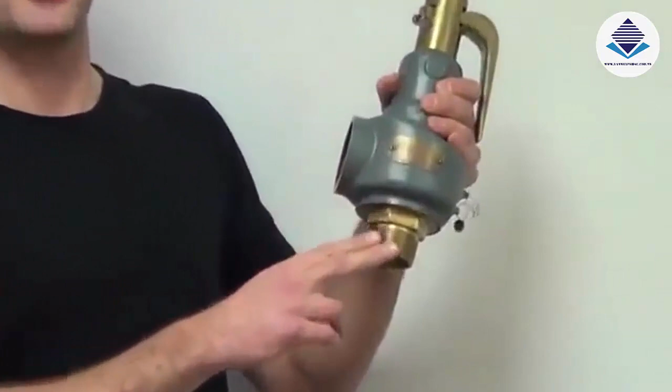The inlet and outlet may be threaded, it may be flanged, clamped, or even butt welded. Above the inlet is the body and the bonnet. On this valve, the body and the bonnet are one-piece construction. Typically on larger valves, the bonnet will be bolted to the body for ease of maintenance. The bonnet may be open or closed. If it's open, the spring will be exposed to the ambient conditions.

Above the bonnet is the cap. Again, the cap may be open or closed. If the cap is open, you'll be able to see the alignment rod, the compression screw, and the compression nut. On the back of the valve, you'll see the lift lever. Not all PSVs have this lift lever, but if they do, they serve two purposes.

One, if the valve is seeping a little bit, you can lift the lever and try to reseat the inner disc. Hopefully that will prevent the seepage. Two, you can test the functionality of the valve. By pulling on the lever, the internal spring will compress and the valve will pop, and you'll know that it's working. This gives no indication of set pressure though, it's only functionality. On the front of the valve, you'll see a nameplate. This essentially shows who made this valve and some important information on the characteristics of the valve.

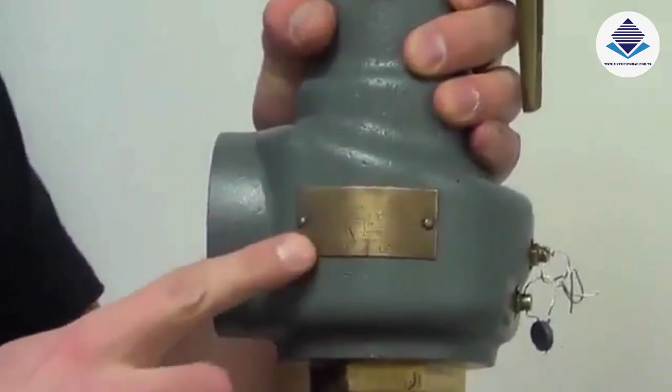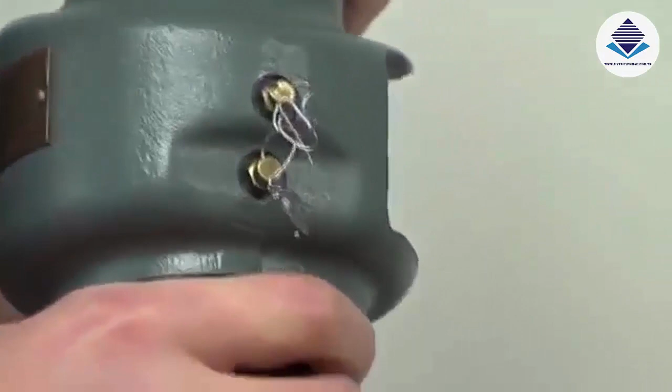On the back of the valve, you'll see some screws. Not all valves have these screws. Some valves only have one. The important thing to realize is all the screws are wired shut and they have a clamp on them. This prevents tampering, and also the clamp indicates which valve shop worked on this valve. And if this wire is missing, the valve must be taken out of service and it must be maintained before it's put back into use.

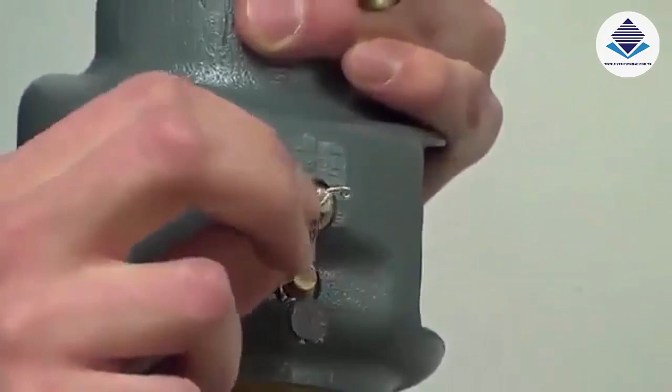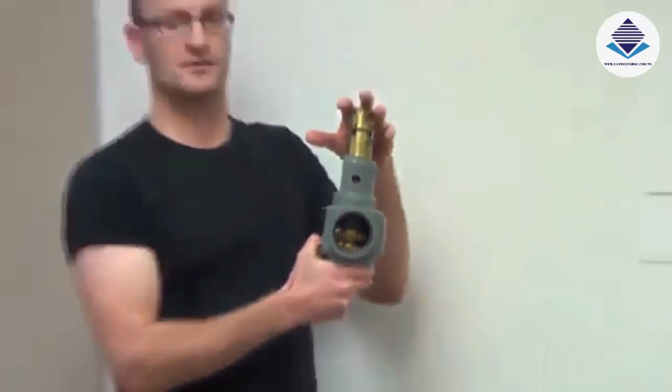On the front of the valve, you may see a vent hole. It's important to realize on a traditional PSV, this vent hole must be sealed when it is in service. That's incredibly important. Again, on a traditional PSV, the vent hole must be plugged when the valve is in service. Now that I've explained to you the outside of the valve, I'll try to explain to you the inside of the valve and the inner mechanisms.

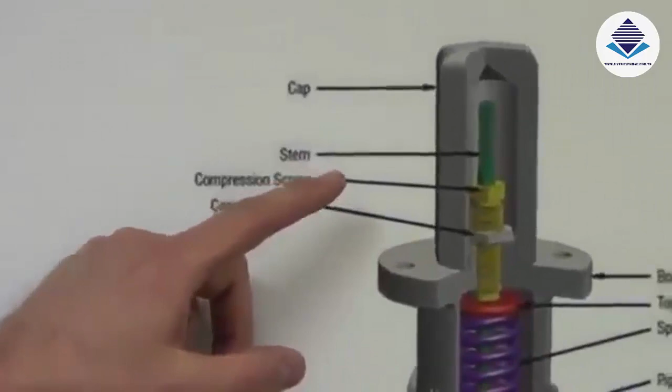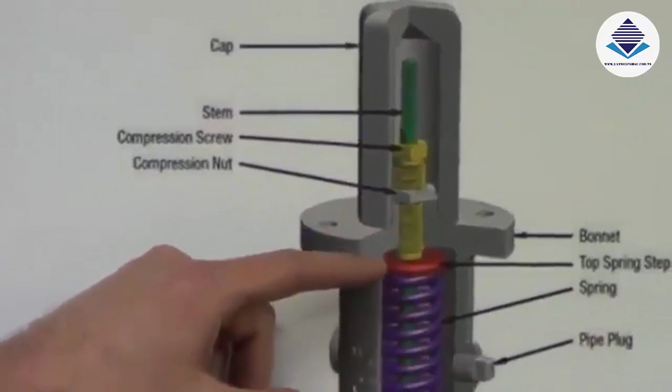I managed to get this image from the Flowstar Valve Shop off the internet, and it gives a good representation of the inner mechanisms of the valve. First, if you start at the cap, you'll have the alignment rod on the inside. The alignment rod must be straight and true in order to ensure that the valve functions the way it's set. Below that, you have the compression screw and the compression nut. Essentially, these serve to set the compression of the spring to make adjustments to the opening pressure. Below that, you have the spring, which is surrounded by the spring steps, which essentially hold the spring in place. As you move down, you have the guide, you have the disc, the blowdown ring, and then the inlet.

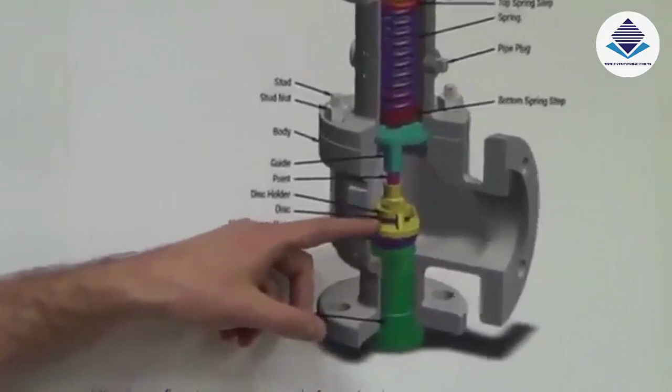On the disc, it is a circle, but it has a skirt around it, which is called the huddling chamber, which essentially serves to increase the surface area that the process would be exposed to. I'll explain this in a few minutes.

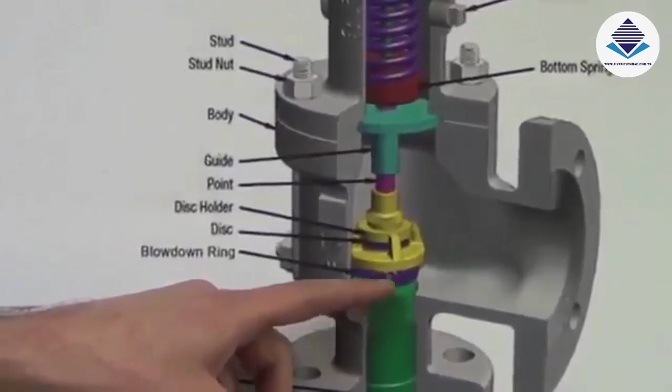As far as the rings, not all PSVs have rings, and some only have one. If it has one ring, it is called the blowdown ring. If there are two rings, you will have a guide ring, which is the blowdown ring, and a nozzle ring, which is the adjusting ring. If you have a blowdown ring, this will essentially change the dynamics of the valve, and you can use it to change the blowdown rate.

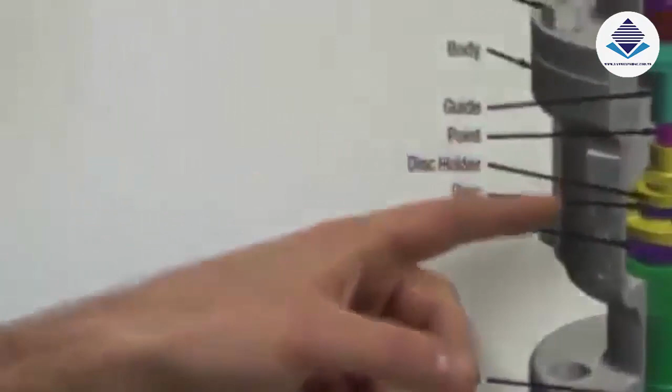If you thread the blowdown ring up, you will decrease the blowdown. If you have an adjusting ring, you'll be able to increase the blowdown, and you'll have a more distinct pop. Typically, the adjusting ring is not set by the valve shop, it's set by the manufacturer, and rarely is it adjusted. Now that I've explained to you the inner mechanisms of the valve, I'll draw you some pictures so you understand the forces involved.

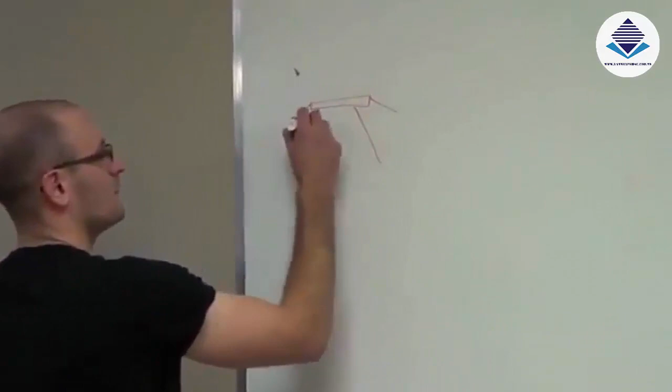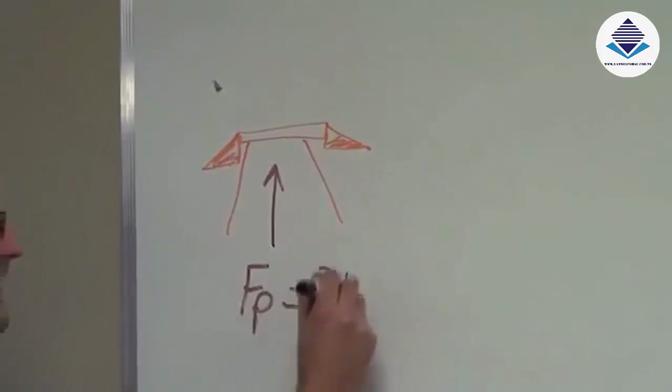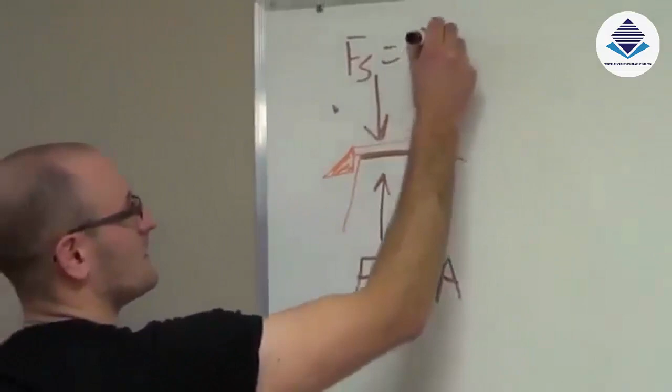If you consider this your inlet, and this your disc, this area here would be the huddling chamber. So you have your process force, which is equal to the pressure times the area. The area will be this right here, and it is fixed until the valve unseats. On the top, you have your spring force, which is equal to your spring constant times the distance of compression.

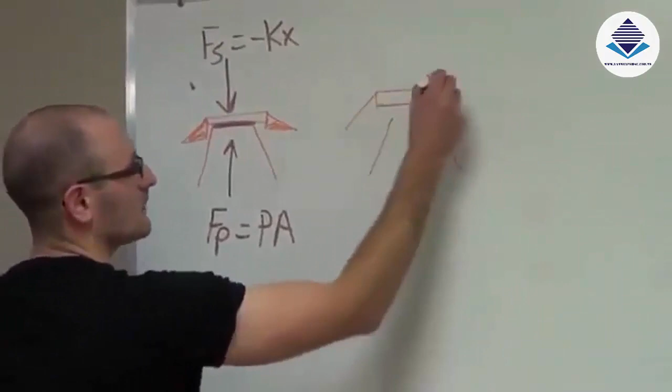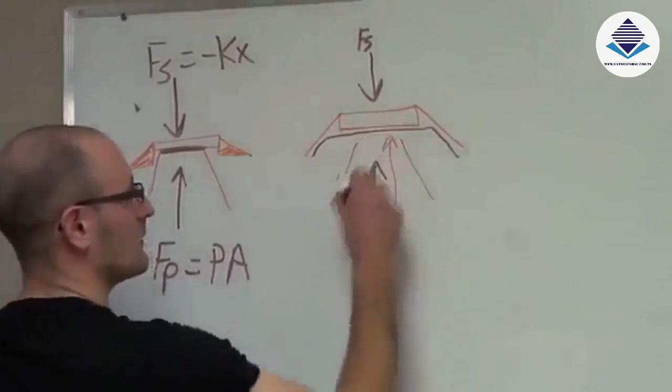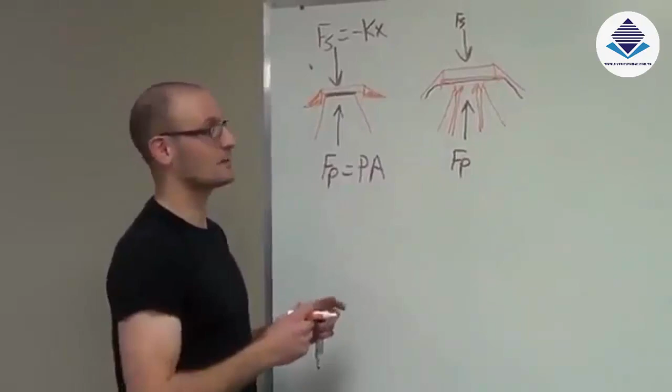Once the valve unseats, so again, you have your inlet, your disc, your huddling chamber, you have your process force, and your spring force. The surface area that the process is exposed to is along here. And essentially, this will be your process in there. This essentially helps the valve to open instantaneously and smoothly. That doesn't mean it opens all the way to the max position. It just helps the valve to open properly, and it also helps it to blow down properly.

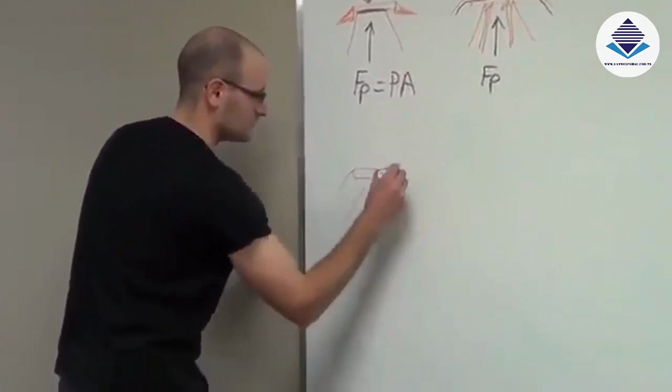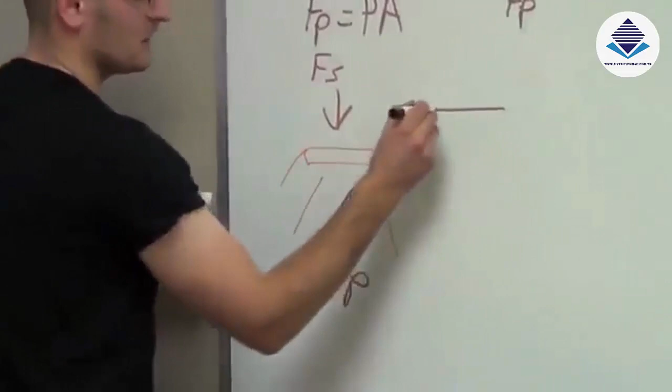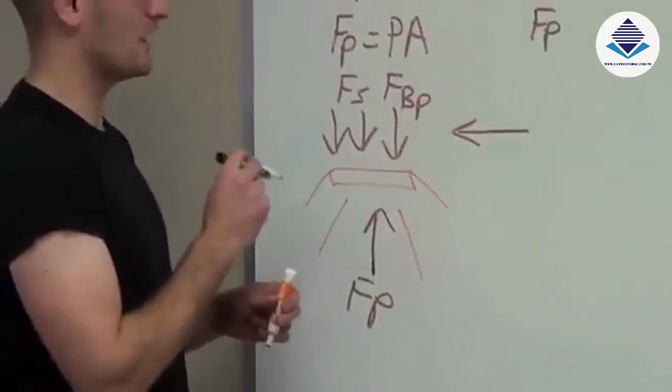There are a few considerations, however. Again, you consider this your inlet, this your disc. You have your process force and your spring force. If you have any back pressure on the discharge side, it is additive to your spring force. If you have back pressure, a traditional PSV is not the PSV to choose. You should use something like a balanced bellows PSV in order to mitigate any back pressure effects.

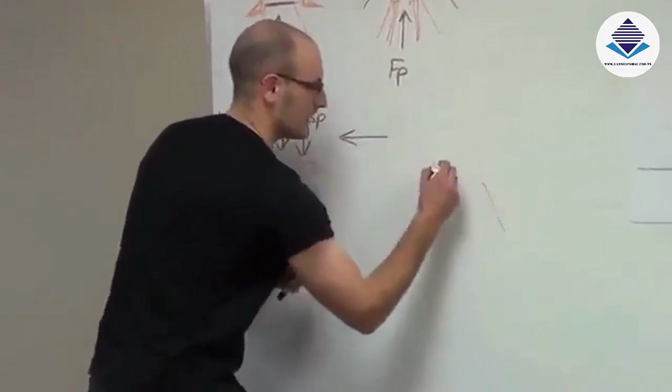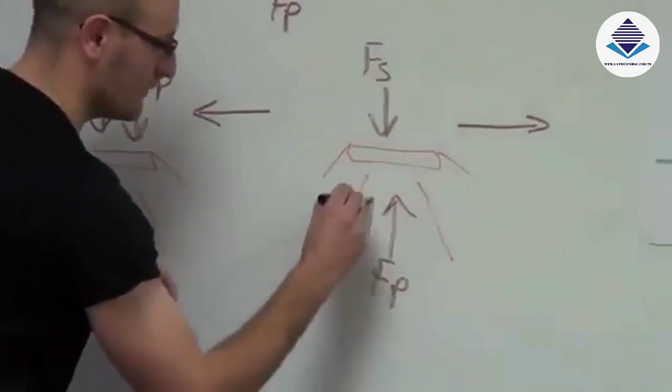There's one other consideration. Again, your inlet, your disc, huddling chamber, process force, and your spring force. If you have a vacuum on your discharge side, this will essentially be additive to your process force, and your valve will open sooner than you expect. It is important that you make all these considerations when you're choosing your valve and sizing your valve.

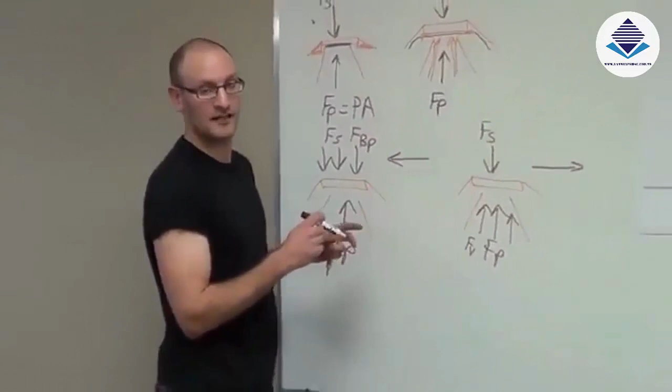Now that I've discussed with you over the last 7 minutes how the valve works, how the forces work, I want to reiterate how important it is to realize these valves are heavily regulated and that you need to understand their mechanisms and how they work when you size your valve. These valves are traditionally considered your last line of defense in an overpressure situation. Thank you very much.